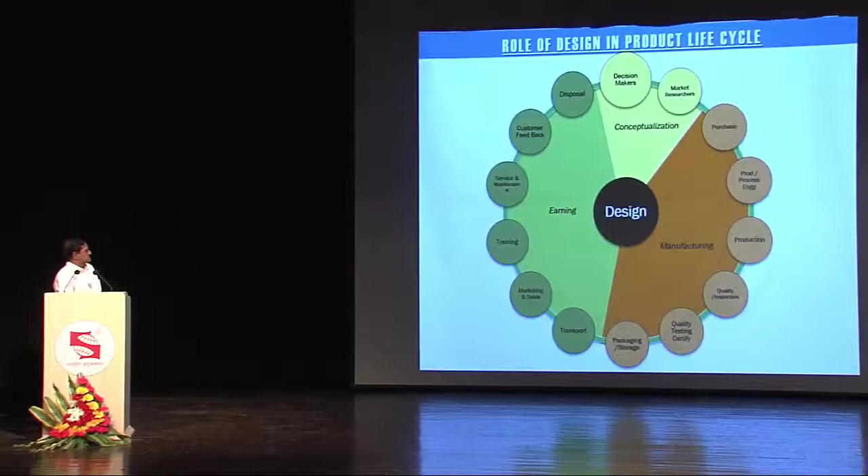Okay, let us go through this software. First of all, we have to understand what is design - the role of design in the product life cycle. Dr. Kute has explained you about conceptualization of the product. Decision makers, the entrepreneurs or stakeholders, conceptualize the design of the product, and market researchers give the inputs to the designer.

Design means the designer is responsible for many things, like the product, whatever conceptualized by the stakeholders. He has to take care of that product like a parent. So he has to take care of all the material cost to purchase, and process engineering costs, so that whatever process is selected will be cost effective. Then he has to take care of the productivity for the production department, so that whatever design he makes should be production worthy, as well as quality, and test worthiness is required from the user's perspective.

Then it must be packaged properly, transported with cost effectiveness, sold to the market, and training given for service and maintenance - it should be a serviceable product. He has to take into consideration all aspects of servicing also, initial design, and customer feedback on usage or improvements required from the user's point of view. So this is the role of design in the product life cycle of the product.

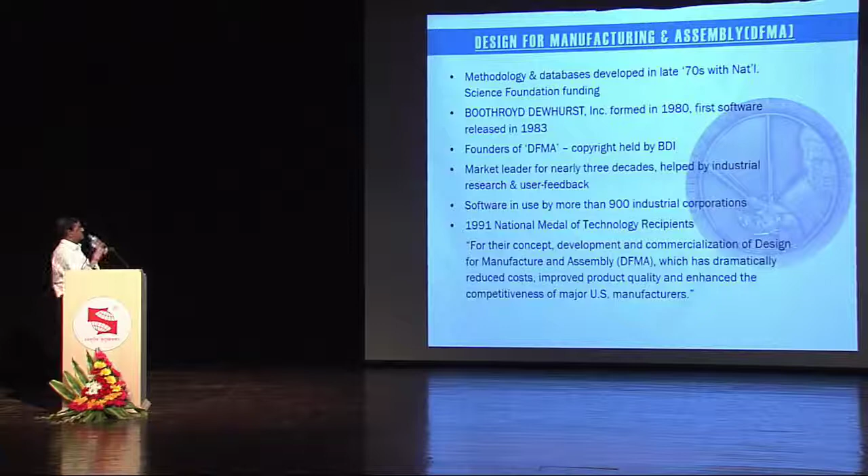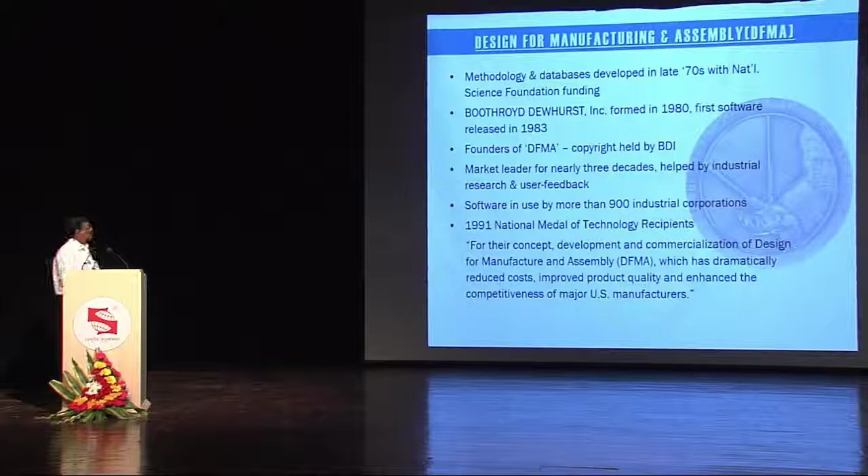So this software, DFMA, is developed by Boothroyd Dewhurst Incorporated in the 1980s. It was released in the market in 1983 in the US, and they hold the copyright of this DFMA. Market leader for nearly 3 decades, helped by industrial research and user feedback. I already told you this software is being used by 900 industrial corporations all over the world. What is DFMA? DFMA is a quantifiable method to identify unnecessary individual parts in assembly and determines assembly time and cost, with guidance in selection of material and processes.

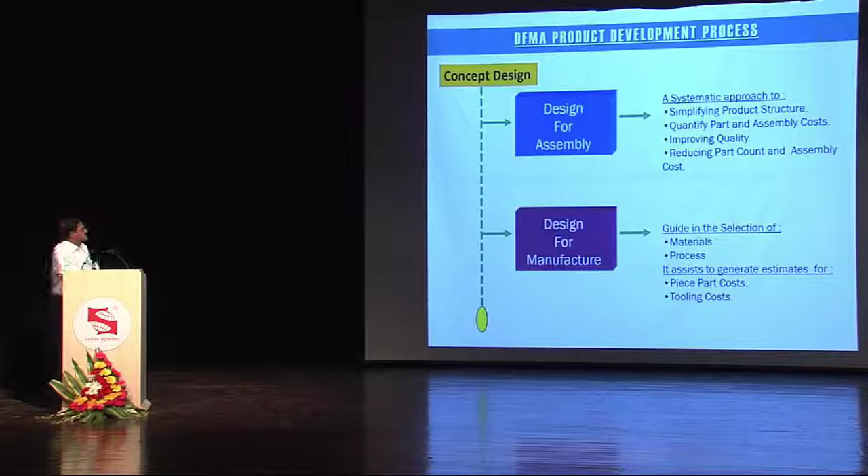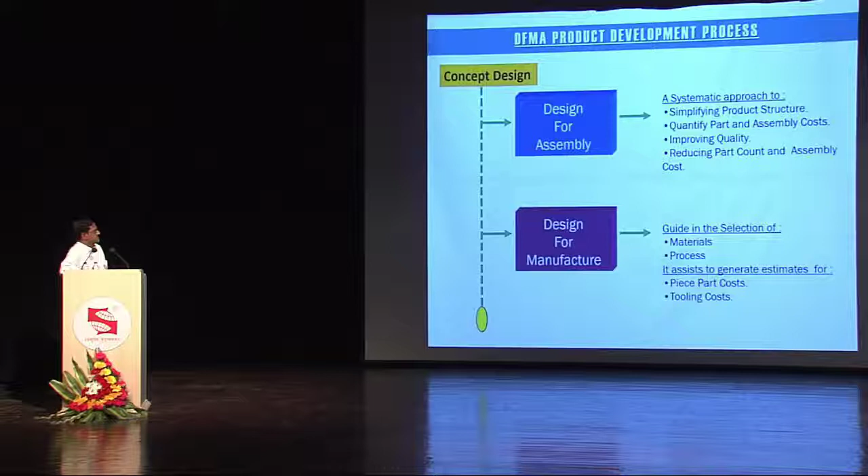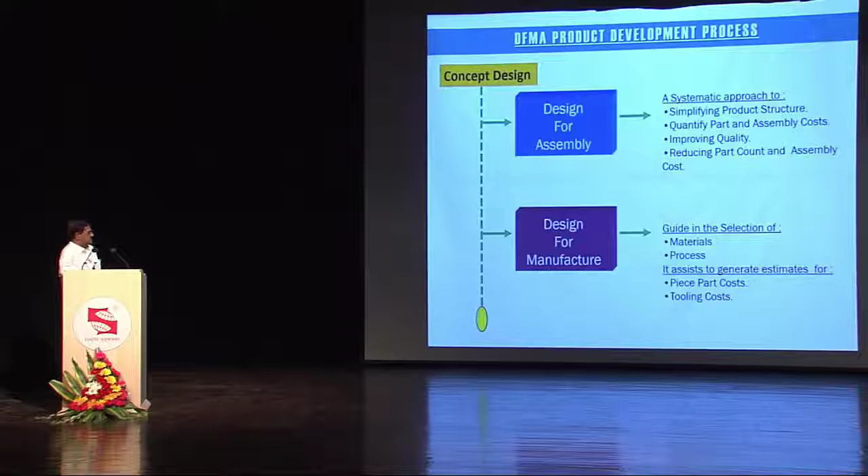Next is, what is concept design? Means design for assembly - it's a systematic approach of simplifying product structure, then quantifying parts and assembly costs, improving quality, and reducing part count and assembly. Then design for manufacturing - what is manufacturing? It consists of various processes and various materials. So this software helps in guiding you for selection of materials and processes according to the product requirement. I will explain in the later slides how it helps in selecting materials as well as processes, and it works out the per piece cost also, and tooling cost also it works out.

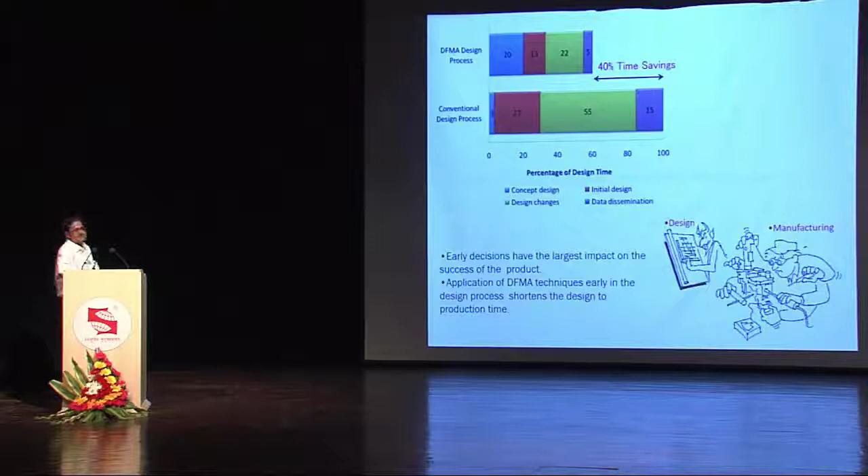So DFMA design process and conventional design process helps in reducing concept design cost, design changes, initial design and data dissemination. These are the things, it reduces almost 40% time in the product development process. Early decisions have the largest impact on the success of the product.

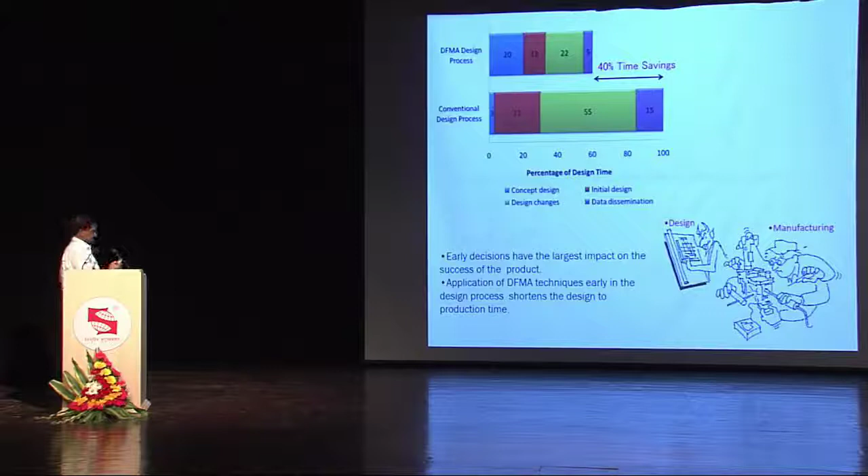So DFMA, if you do at the design stage itself, means if you work out all the related information in the design stage itself, it reduces all the time what you could see. This is the greatest time we lose in the conventional process. This time gets reduced.

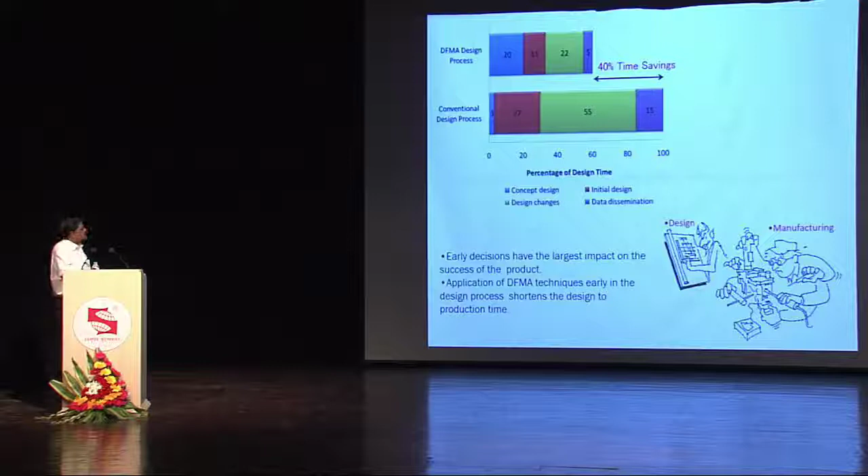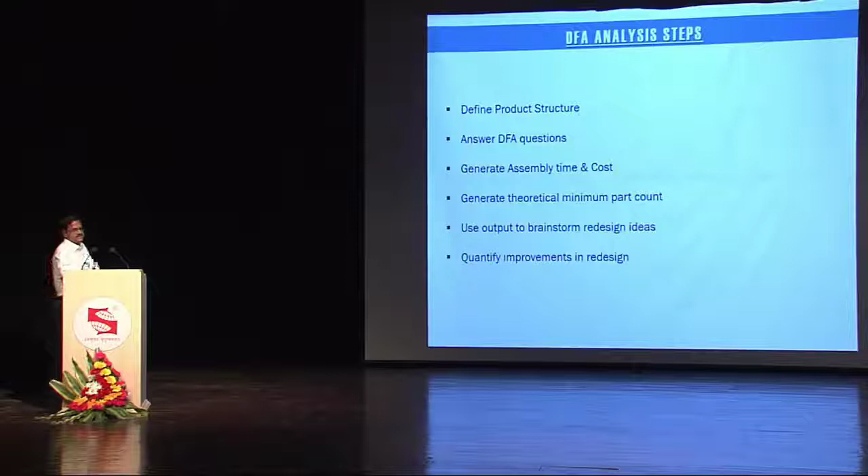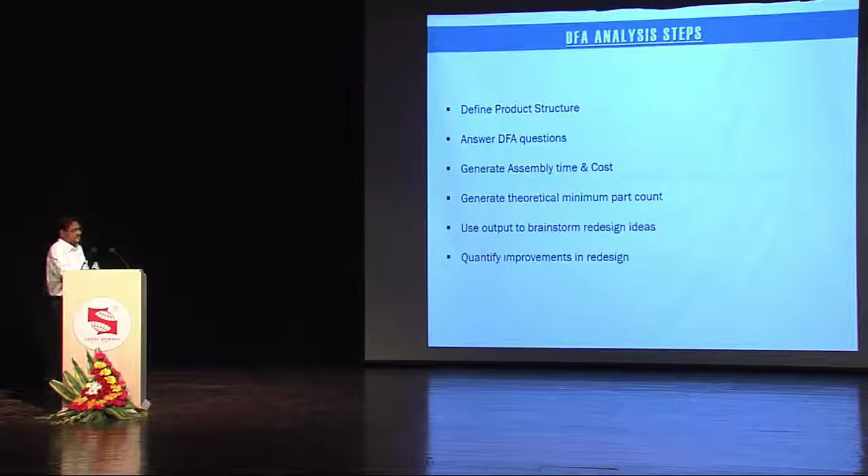So we'll go to the DFA design for assembly steps. Define the product structure, then answer the DFA questions. This software asks you so many questions, you have to answer those questions. Based on that, it works out the information you require on the product. Generate assembly time and cost, generate theoretical minimum part count, use output to brainstorm redesign ideas. This is very much interesting. Then quantify improvements in redesigning.

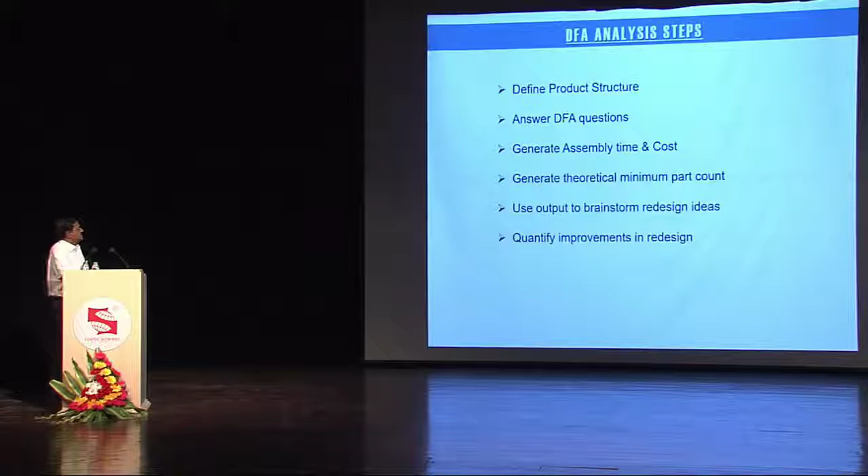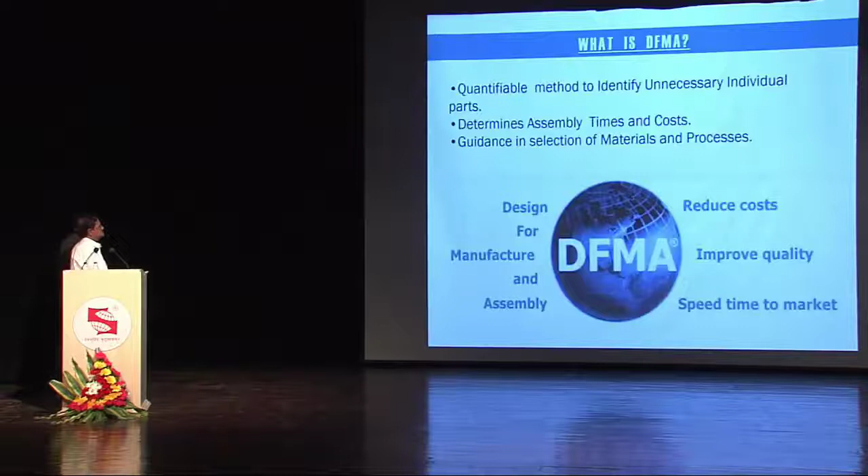Not working. Some problem. This side, that side. Okay, sorry for the little interruption on this.

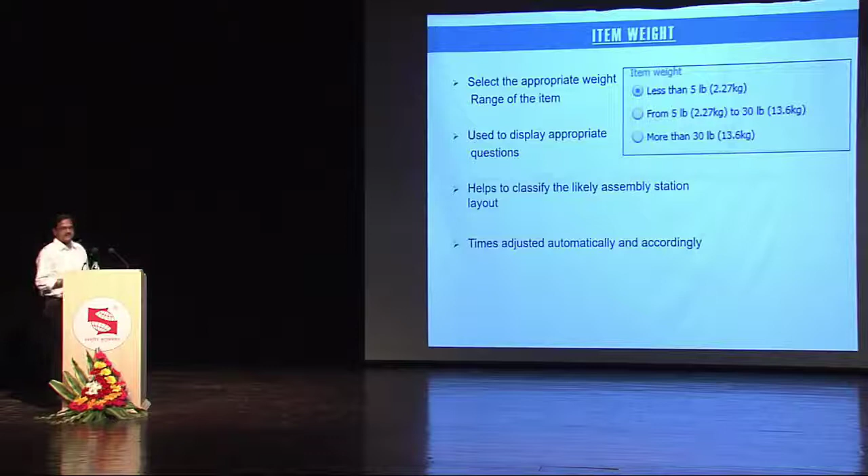Then this is the item weight inputs, like options are there that we have to give. Then item dimensions inputs, you have to give the envelope dimensions it asks. Then the minimum part criteria is there, theoretical necessary and candidate for elimination.

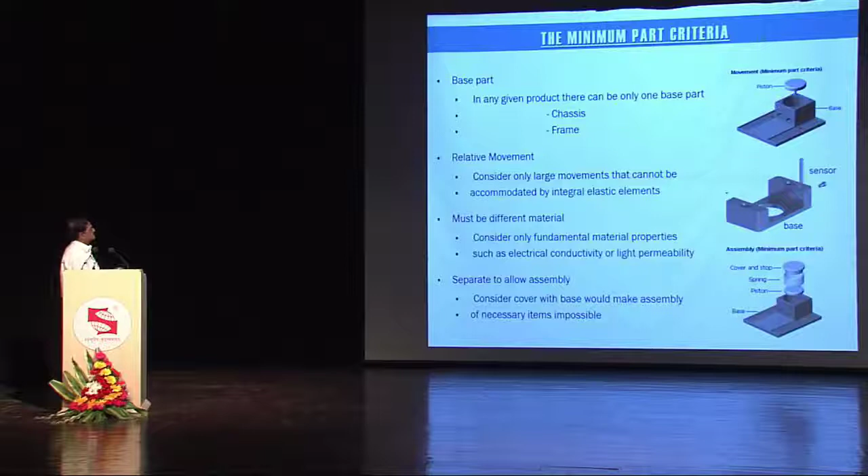Then the minimum part criteria, factors which affect the handling. Handling is one of the areas which is very much essential in the assembly as well as in the time involved in manufacturing the product.

And the handling difficulties, then insertion difficulties. This is all the things that have been derived in the software itself. Based on the questions it asks, it works out the time required as well as the cost required for those things.

Securing process is also important. And this is the product worksheet which gives you the whole idea of total cost for each and every component manufacturing as well as assembly of the product. Then suggestions for redesigning.

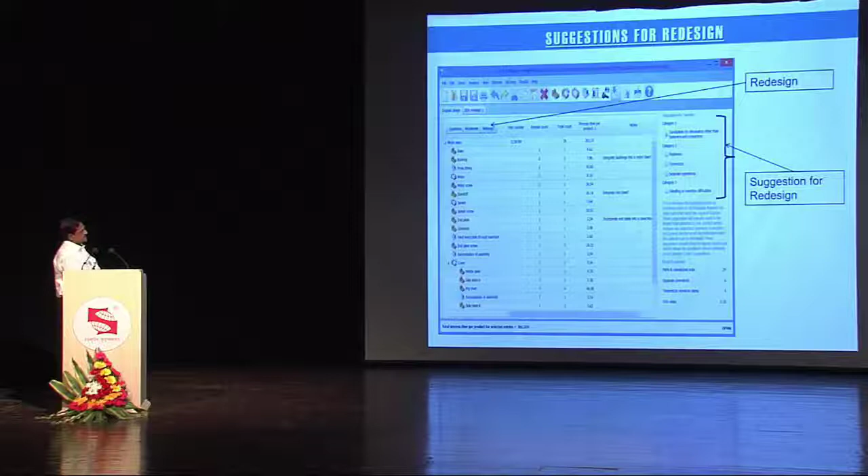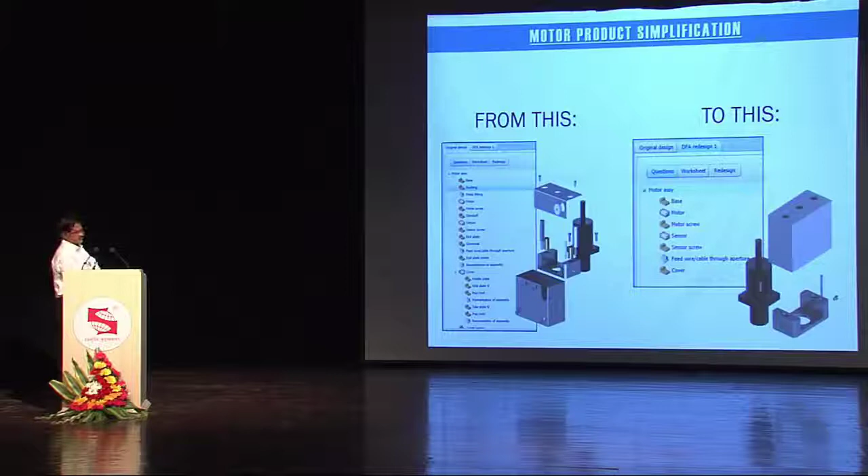So based on the volumes or product target cost, we can work out the redesigning areas where software suggests us for redesigning the product. From this you can see these are the number of parts involved in a motor assembly. After DFMA, this is the number of parts reduced to this, after the brainstorming of the product.

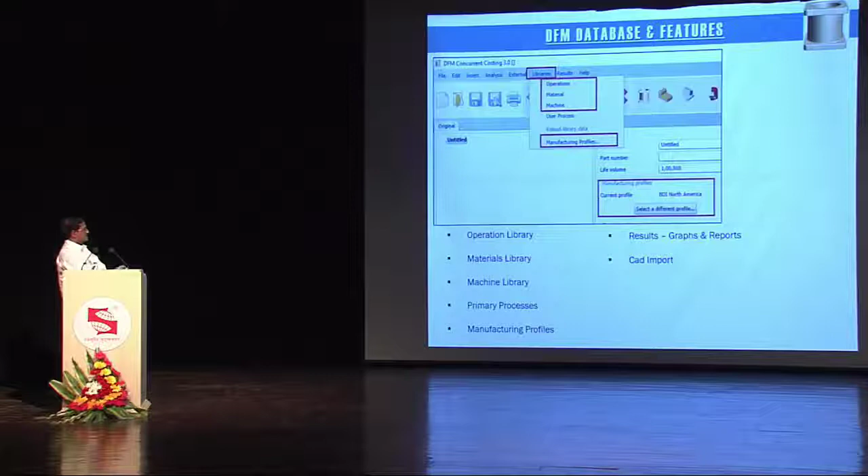Then database and library features are there in the DFMA. So these are the libraries: operation library, materials library, machine library, process, primary process and manufacturing profiles, results, graphs, and reports. And even you can import the CAD data in the software. So based on the CAD data 3D model, it will calculate the volumes, weights, etc. And you can even calculate the tooling requirement also based on that DFMA data.

This is the operation library, means turning, whatever machining operations are there, all those are covered in this library. So those are to be given as an input based on your product.

Okay, so we were here. This is operations library where you can even see detailed operations of PCB, means printed circuit board assembly also, it gets covered. The detailed operations of all the operations being carried out on a PCB, those are covered in the software.

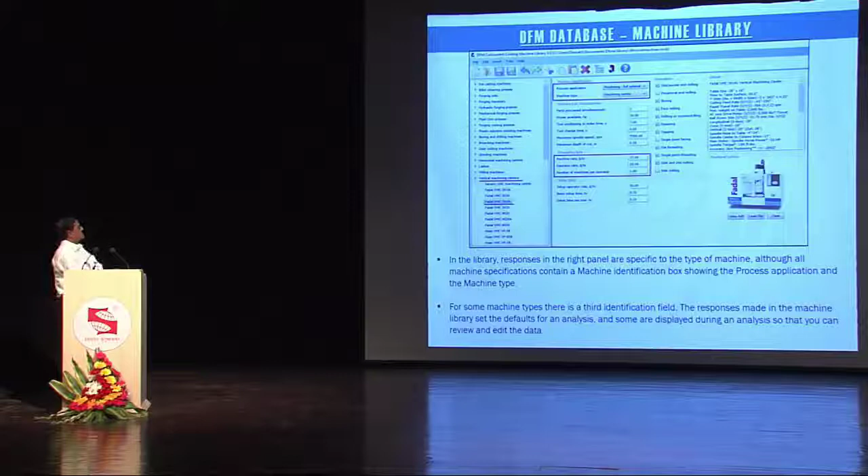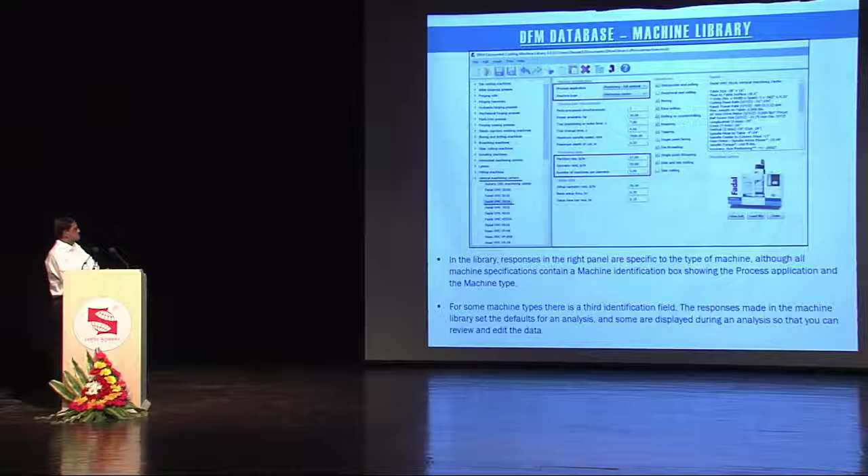Okay, this is a machine library. So you can see these are the machines, even VMC, generic CNC center, or whatever manufacturers are there. Whatever database and libraries are available, those can be customized according to your requirement, so you can put in the inputs of your own machines and calculate the cost.

And these are the processes: sheet metal stamping, die casting, extrusion, forging, injection molding, investment casting, machining. All those things are covered in this software, so you can really select the process according to your production volume requirements or target production requirement. These are the databases available in the software currently.

And for India, a company in Chennai is creating a database based on Indian manufacturers and users. They are taking inputs from big industries.

These are the results areas where you can get executive summary, cost breakdown, total cost versus life volume, cost totals in bar charts, cost totals stacked bar chart, etc. You can get formats as you wish, like Excel, HTML, or whatever other formats you require to present it to the management also.

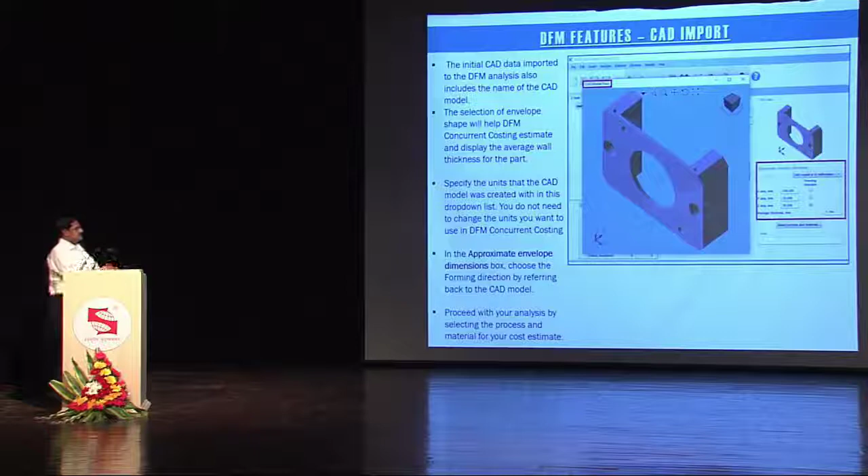This is a CAD import option where you can import the CAD model itself, so that you can do the costing at the design stage itself, making it easy to take a call on your design.

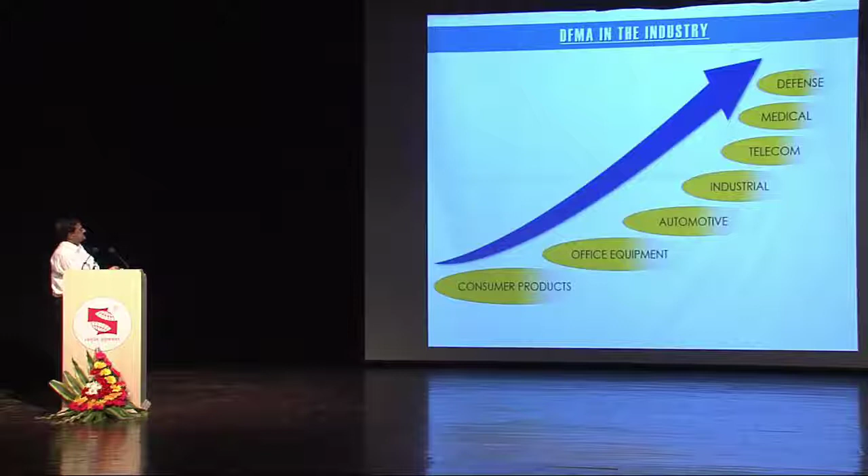So this software is in the industry for consumer products, office equipment, automotive, industrial, telecom, medical, and defense also.

This is a small example of design for no assembly. This is a simple hole-making punch on paper, which can be developed without making an assembly. You can see this is a single integrated part, which can be converted through brainstorming sessions.

In similar products, you can develop through the various questions the software asks. Based on that, you can work out a similar product like this. A single paper punch can be molded.

If you look at this product, it's made out of so many parts: the bracket, the rivets, the base, the cover, the small one, there's a spring under it and all. So all these things can be eliminated and you can reduce the cost of the product.

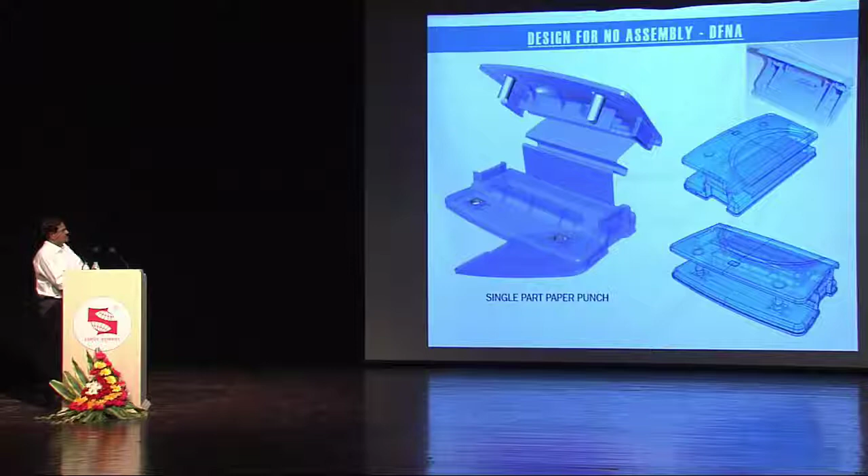And this is the DFMA support areas, meaning it supports the analysis of the current design. Whatever current design you have, you can really analyze whether it is really cost effective or not. You can go for VAVE analysis of the current product, then identification of problem areas where you are facing issues from the cost or quality standpoint. You can identify those areas and reduce the cost as well as the problems.

Then redesign and DFA analysis of possible solutions, selection and reporting of the solution, development of new products, re-engineering of existing products, benchmarking competitors' products, accurate cost estimates, quick assembly time estimates, design trade-offs, and decision making. These are the things you can do with this software.

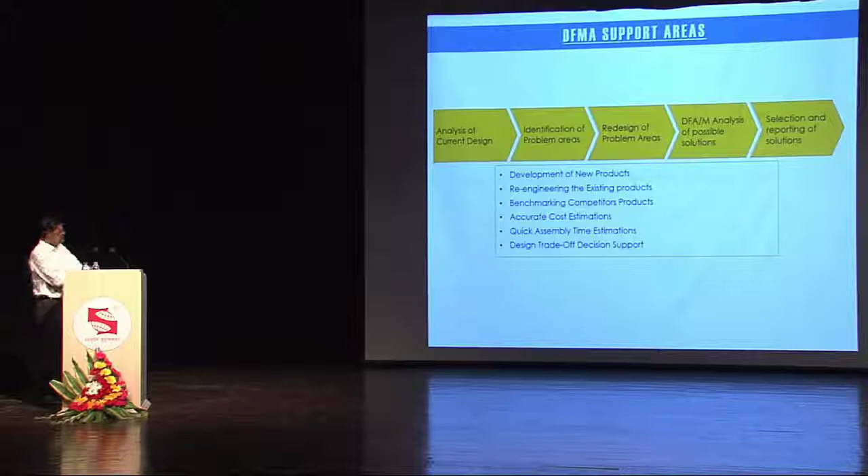And these are the advantages of DFMA: systematic procedure to quantify assembly and manufacturing, encourages concurrent engineering, builds team consensus, reduces product cost, speeds time to market, and improves product quality.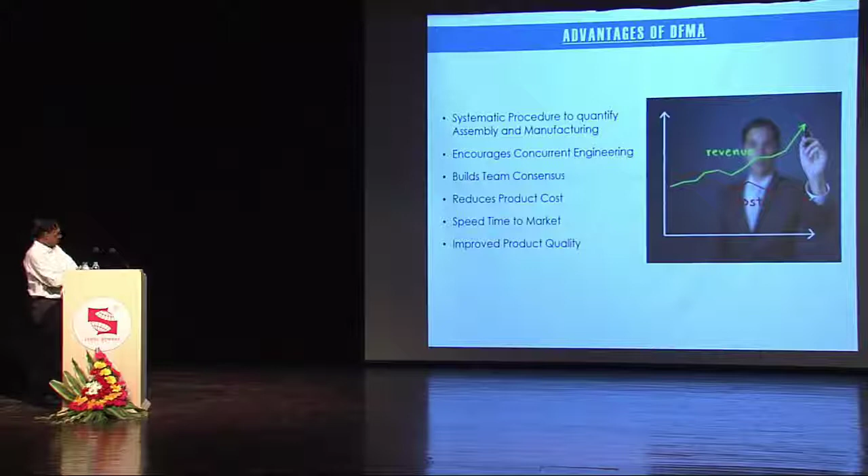And you can find more information on this software through this YouTube channel. You can see the live demo of the software and case studies and all those things. In fact, some institutions have already bought this software for training engineers like you, and some universities have started a specific program on DFMA also.